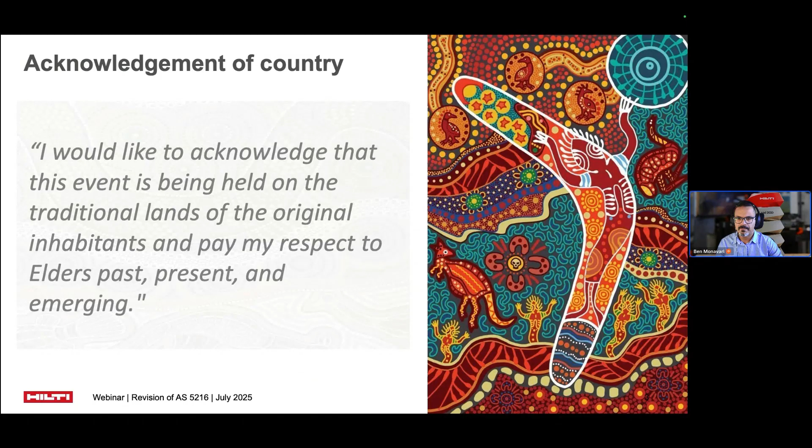Allow me to introduce myself. I'm Ben Monavari, Hilti Australia's Codes and Approval Manager. I'm a structural engineer with over 15 years of experience in industry. I've been with Hilti Australia since 2019, and I hold a PhD in structural engineering and a master's degree in earthquake engineering.

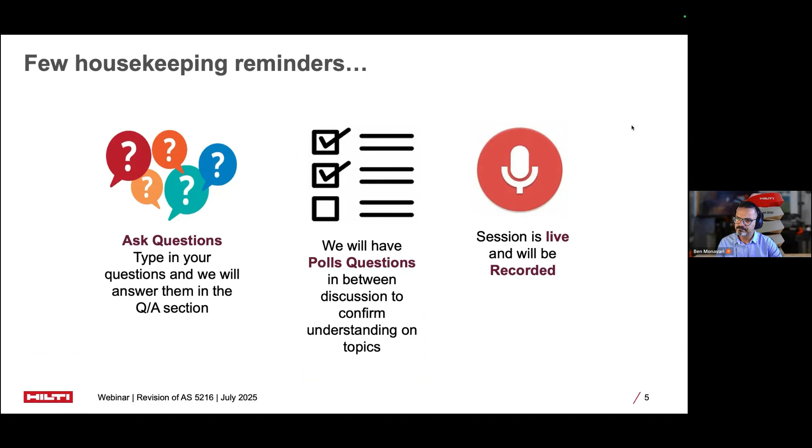To understand the significance of the AS5216 2025 draft and its changes, it helps to revisit where we started. Before 2015, Australia had no standardized design requirements for fasteners. Engineers relied primarily on manufacturers' guidance, which created inconsistencies across the industry. This changed dramatically with the formation of AEFAC in 2012, a collaboration between Swinburne University and 6 industry partners, including Hilti Australia. Their work resulted in SA TS 101 in 2015, Australia's first industry guideline for fastening systems.

The momentum continued with AS5216 becoming a full standard in 2018, followed by its inclusion in the National Construction Code in 2019. The 2021 revision added crucial seismic provisions and specifications for post-installed rebar. Now, the 2025 draft builds on this foundation by introducing fatigue design, durability requirements, improved post-install rebar design method, and provisions for power-actuated fasteners. These provisions significantly improve the standard.

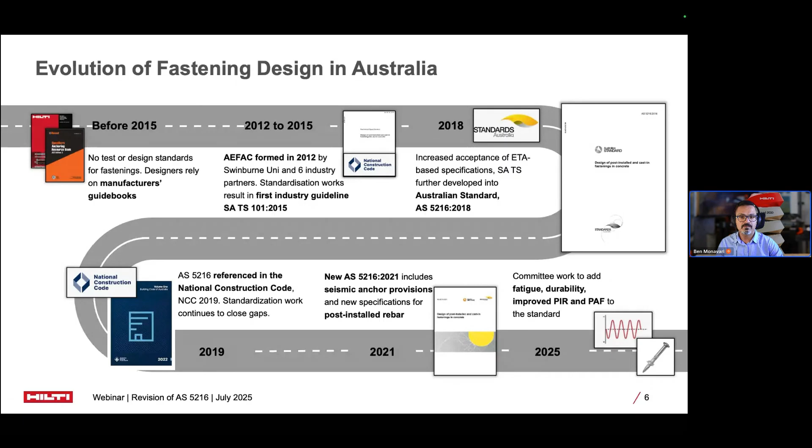As discussed, the 2025 revision introduces 4 key enhancements that will transform fastening design practices in Australia. First, a new normative framework for fatigue design in Appendix G, addressing a critical gap for infrastructure and machinery applications. Second, mandatory durability design requirements in Section 10 ensure long-term performance considerations. Third, new provisions for power-actuated fasteners in Appendix E, specifically for redundant non-structural systems. Finally, an advanced bond splitting model for post-install rebar in Appendix D, offering significant design efficiencies. Each of these enhancements responds to identified industry needs and aligns Australian practice with international best standards.

Let's examine each area in detail.

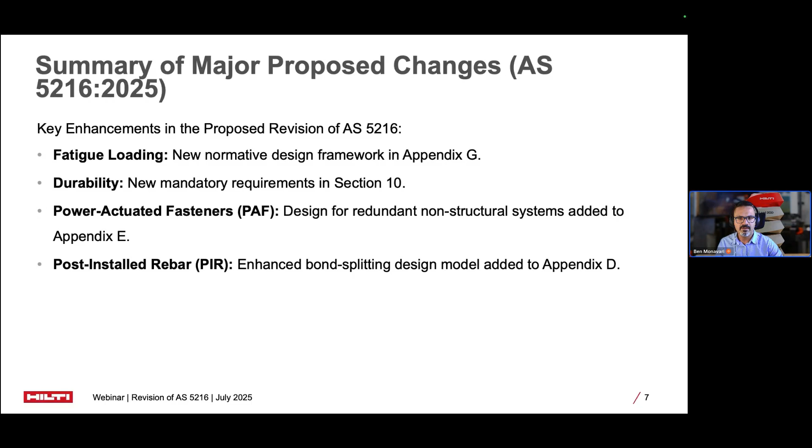Before going to the next slide, I want to start with a question - the first one, which you should see as a pop-up on your screen. Which AS5216 2025 enhancement are you most interested to learn about in this session? Is it the fatigue design framework? Is it durability requirements? Is it about power-actuated fasteners provisions? Or is it about the improved post-install rebar design method? There's no right or wrong answer here. I just want to understand what is the most important update in this standard. I'll wait a couple of seconds to see how you want to respond, and then we go to the next slide.

Okay, I don't see the answers here, so I will just proceed with this one.

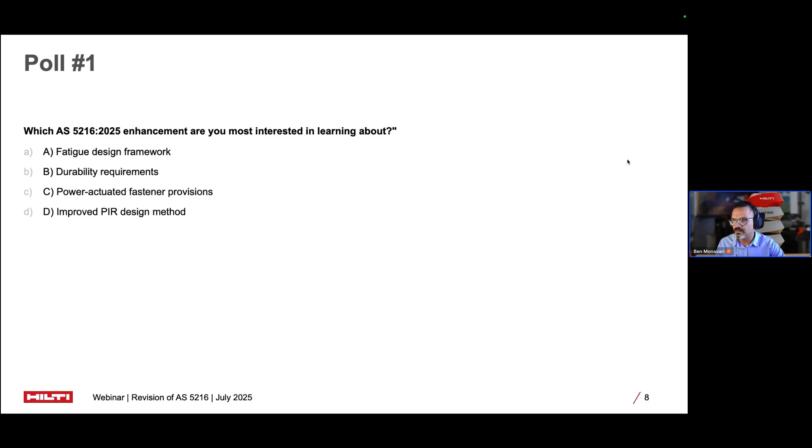Let's begin with fatigue design, a critical consideration for infrastructure, machinery support, and dynamic systems that has been largely overlooked in Australian practice until now.

Appendix G introduces the first normative guidance for fatigue design under AS5216. Previously, AS5216 2021 contained no normative content for fatigue, and designers relied on AEFAC Technical Note 14 as guidance. The 2025 draft fundamentally changes this by formalizing fatigue design requirements. The framework applies to pulsating tension and alternating or pulsating shear actions, but importantly excludes redundant non-structural fasteners, fastening with annular gaps, and shear loading with lever arms. A critical requirement is mandatory pre-qualification to EAD 330250, the European assessment document for fatigue testing of post-installed fasteners.

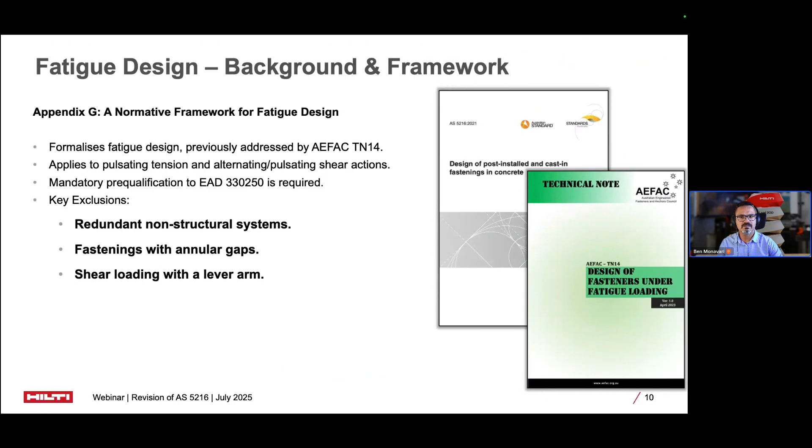It's essential to understand that fatigue represents a distinct loading category. Fatigue is characterized by repeated high-frequency load cycles, typically between 10,000 to 100 million cycles. This distinguishes it fundamentally from seismic actions, which involve fewer cycles, usually between 10 to 10,000, and shock loads, which involve very few cycles, typically between 1 to 20. Each loading type affects fasteners differently. While seismic loading might cause 100 significant cycles during an earthquake, fatigue involves millions of small amplitude cycles from machinery vibration or traffic loading, and so on. This difference in behavior means fatigue must be treated as its own distinct design category with specific testing and design requirements.

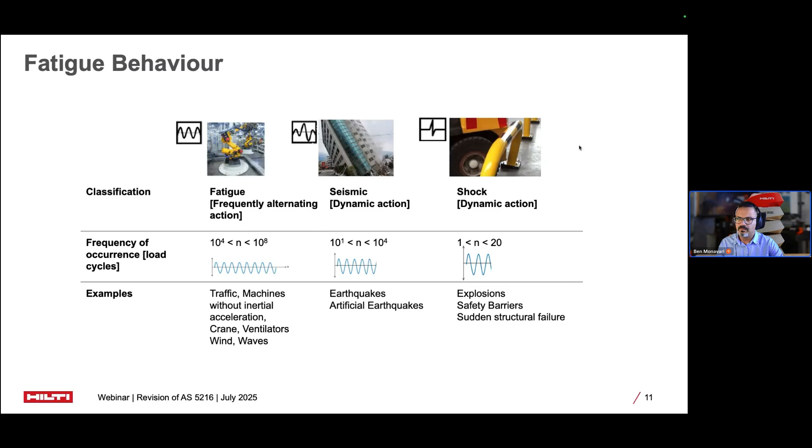Okay, next it's time for the second question. Which loading scenario represents a fatigue condition? 50 load cycles during an earthquake, 500,000 cycles from machinery vibration, 5 cycles from wind gust, or a single impact from dropped equipment.

I guess this is a very easy question, and many of you are responding with the correct option, which is B: 500,000 cycles from machinery vibration is a fatigue load.

Fatigue design is built around the SN curve, also known as the Wöhler curve. This fundamental relationship shows how load range and the number of load cycles affect resistance. The curve demonstrates that as the number of cycles increases, the allowable load range decreases, eventually flattening at what we call the endurance limit.

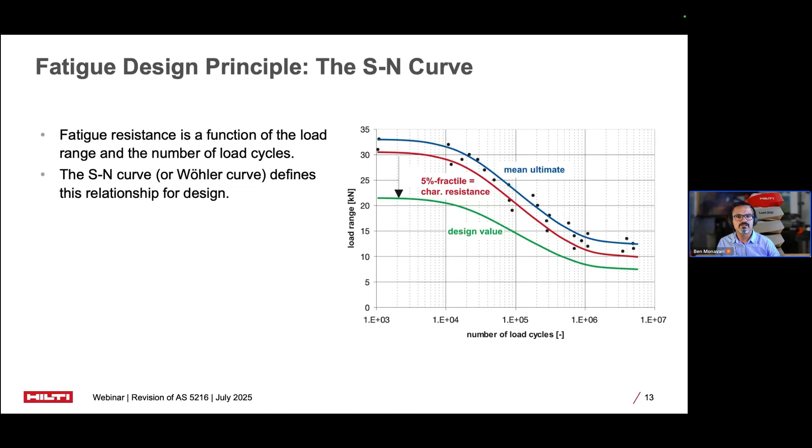Importantly, designers don't use average values in fatigue design. We use characteristic resistance values, the 5% fractile, and apply safety factors to determine design values. This conservative approach accounts for the statistical nature of fatigue failure and ensures reliability over the structure's service life.

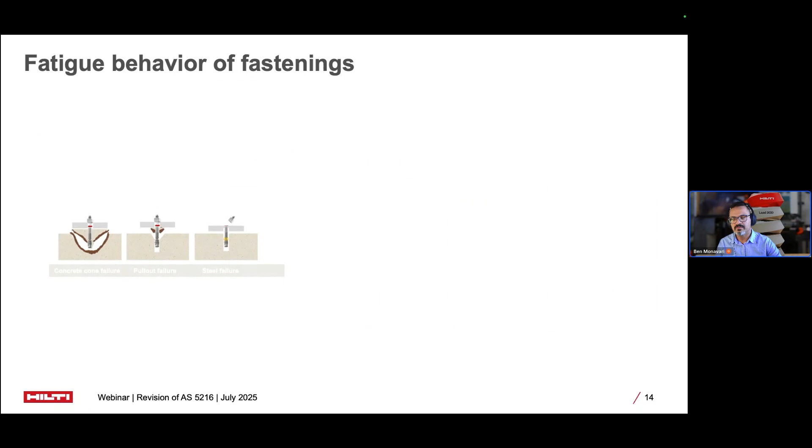Understanding why fatigue-approved anchors are essential requires examining the complexity of post-install fastening systems. These systems include multiple components made from different materials like steel, anchor, chemical bonds, and concrete, each with different fatigue characteristics and different SN curves. The steel component might fail in the bolt, sleeve, or threaded section, and the failure location can vary across anchor sizes due to different manufacturing processes.

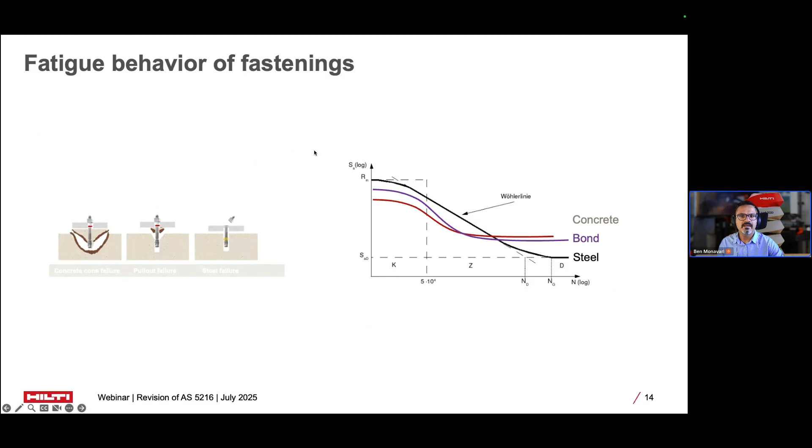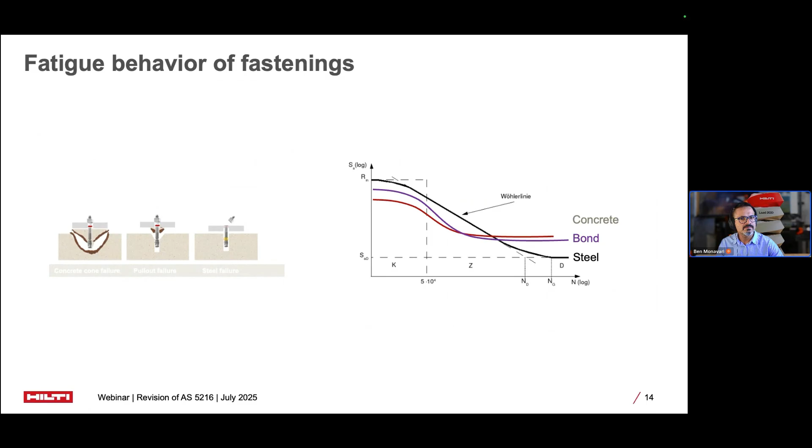On the other hand, the bond component has entirely different fatigue behavior, particularly for chemical anchors. And the base material, which is concrete, adds another layer of complexity because all these components interact as a complete system. Individual component testing cannot predict the overall system performance. This is why fatigue-approved systems must be tested as complete assemblies. And perhaps this is why different anchor systems require separate fatigue qualification, even when they appear very similar.

Cyclic loads are categorized into two main types: pulsating and alternating loads. Pulsating loads maintain the same sign throughout each cycle. For example, tension loads that vary from 10 kilonewton to 50 kilonewton but never go to compression. These are common in suspended loads subject to vibration.

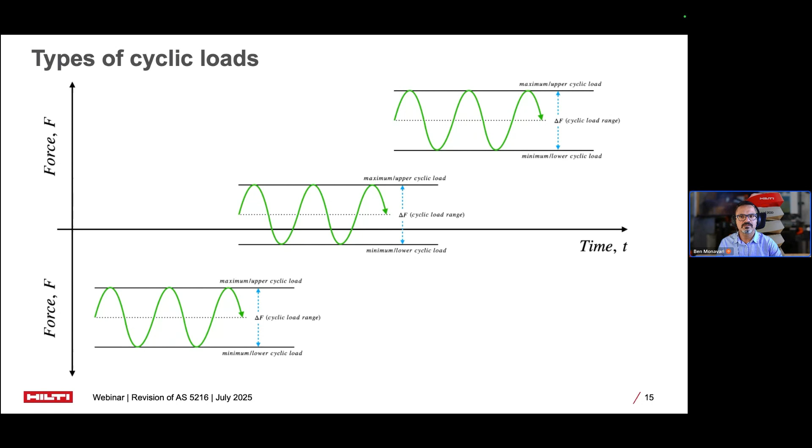On the other hand, alternating loads change sign during each cycle, from tension to compression and back again. This might occur in connections subject to wind loading or seismic action. The distinction is crucial because alternating loads are generally more damaging to fatigue life.

Appendix G includes a simplified design method aligned with Method 2 of EOTA TR061. This approach treats the full applied load as cyclic and checks it against the fatigue endurance limit. While conservative, this practical approach works well when exact load cycle information isn't available, which is often the case in real projects. The design fatigue resistance equals the characteristic fatigue resistance divided by the appropriate safety factor. This ensures adequate safety margins while providing a straightforward design approach that engineers can implement.

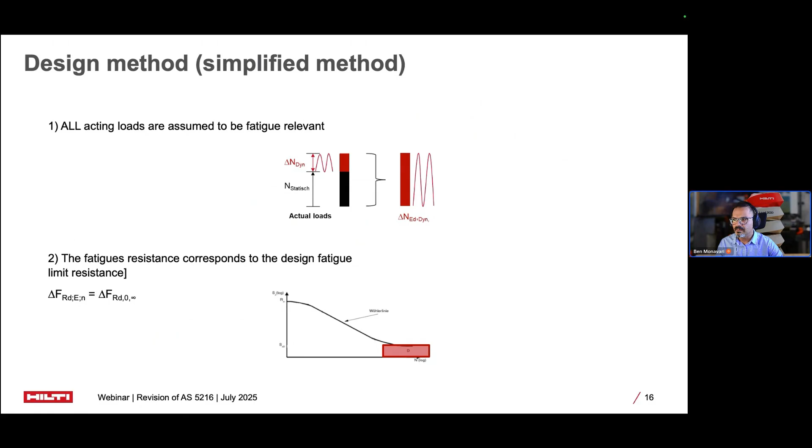Okay, it's time for the third question of today's webinar. In the simplified fatigue design method, what percentage of the applied load is considered fatigue relevant? Is it 25%, 50%, 75%, or 100%? I will wait a couple of seconds for your answer.

I feel like I've already answered this question in the last slide. As I said before, in the simplified method, 100% of the whole load is considered fatigue relevant, which could be a bit conservative, but that's how the simplified method works.

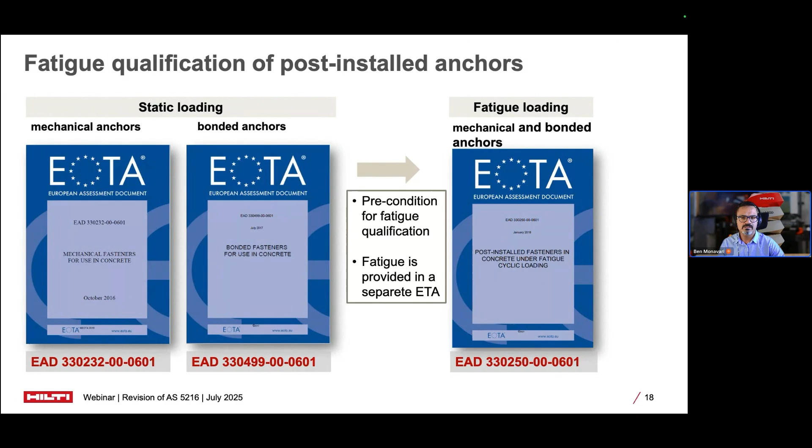For a fastener to be used in fatigue design applications, it must undergo rigorous qualification to EAD 330250. However, this isn't a standalone process. The fastener must first meet static qualification requirements, either EAD 330232 for mechanical anchors or EAD 330499 for chemical anchors. Once we have static qualification, fatigue-specific testing begins. This comprehensive testing program evaluates all potential failure modes under cyclic loading conditions. The resulting European Technical Assessment contains all the resistance values and reduction factors required for fatigue design calculation.

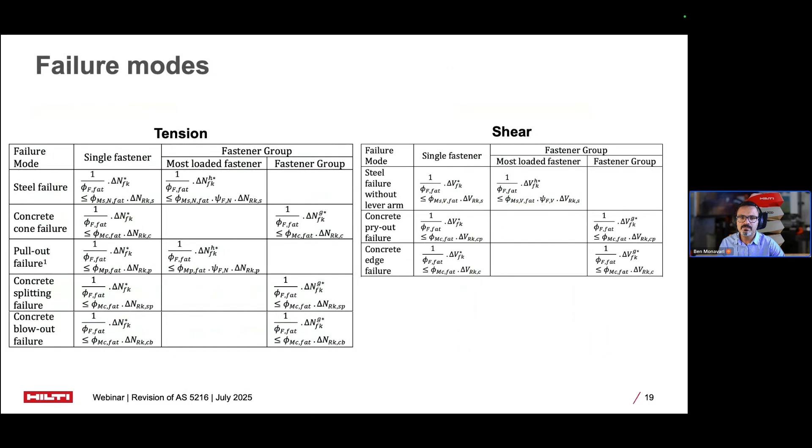Fatigue design requires verification of all potential failure modes: tension and shear, single anchor and group anchor configurations, and so on. Each failure mode has specific fatigue resistance values and reduction factors that must be applied. It's important to note that fatigue doesn't just affect one failure mode. Steel failure, bond failure, and concrete failure all respond differently to cyclic loading. The designer must check all the failure modes.

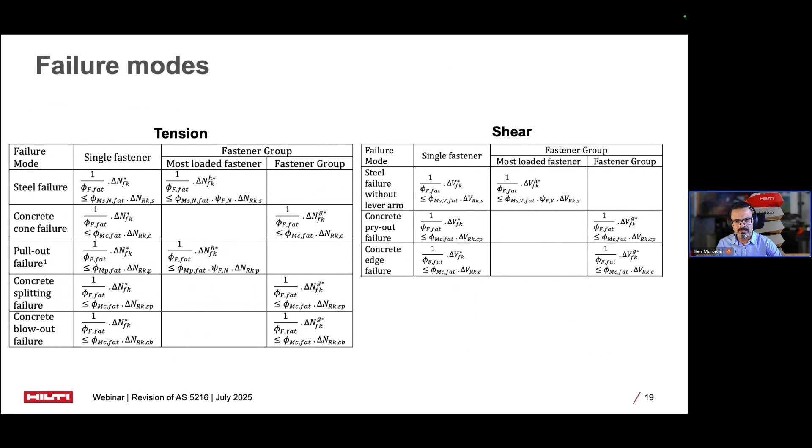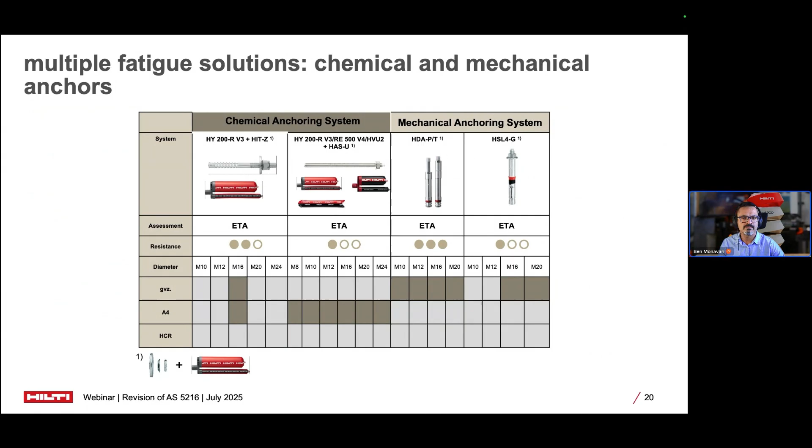Moving to our next major enhancement, durability requirements, which are equally crucial and important for long-term structural performance. Section 10 of the AS 5216-2025 draft introduces a structured approach for assessing long-term fastener performance.

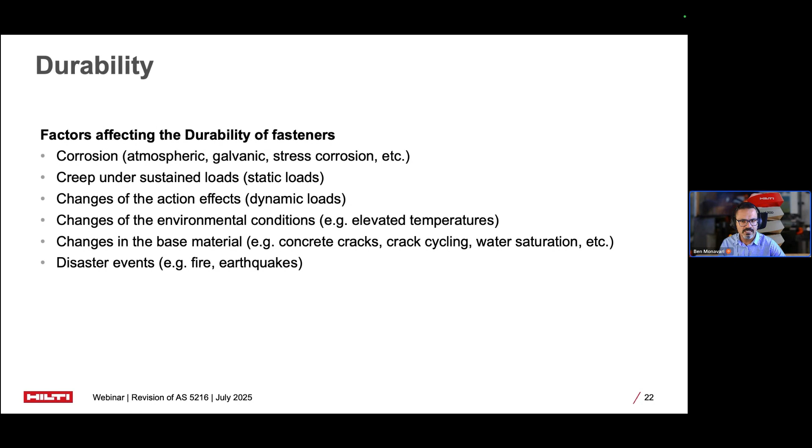Base material conditions are also important. Concrete cracking, crack cycling, water saturation, and carbonation all affect fastener performance. Finally, disasters like fire or earthquakes can significantly impact durability. The new standard requires designers to systematically assess these factors rather than rely on generic assumptions.

The durability assessment framework distinguishes between macro and micro environments. The macro environment includes geographic location factors covered by AS 4312 corrosivity zones, essentially the broader environmental conditions affecting the structure. However, the microenvironment around each fastener can be quite different.

The framework identifies 4 distinct zones: exposed fastener component, the fixture and any annular gap, intermediate layers such as grout or sealant, and the embedded portion within the base material. Each zone can have different corrosion risk and exposure conditions. For example, the exposed portion might face severe marine conditions, while the embedded portion is protected within concrete. This detailed assessment enables more accurate durability predictions.

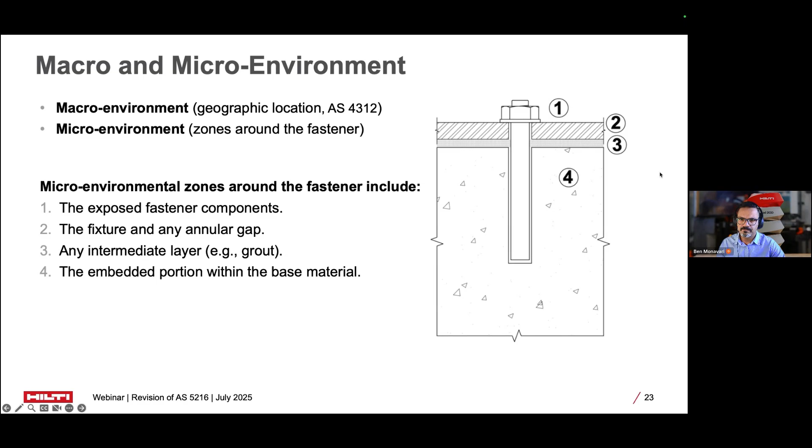All right, time for the next question. How many distinct microenvironments does AS 5216-2025 identify around each fastener? I also responded to this question in the last slide, but let's see how many of you catch that in the slide. So the first option A is 2, B is 3, C is 4, and D is 5. I will wait a couple of seconds for you to respond.

Okay, as many of you again have responded to these questions correctly, option C is the correct answer. As discussed, the framework identifies 4 distinct zones: exposed fastener, fixture, intermediate layers, and the embedded portion.

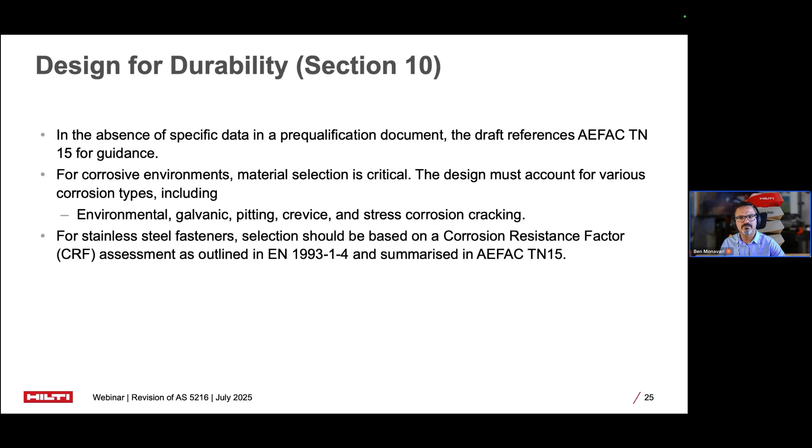So when specific durability data isn't available in a pre-qualification document like ETA, the draft references AEFAC Technical Note 15 for guidance. This comprehensive document provides practical approaches for durability assessment. For stainless steel fastener selection, this is based on corrosion resistance factor, or CRF assessment, as outlined in EN 1993-1-4. This systematic approach matches stainless steel grades to specific corrosive environments, ensuring appropriate material selection for the intended service life.

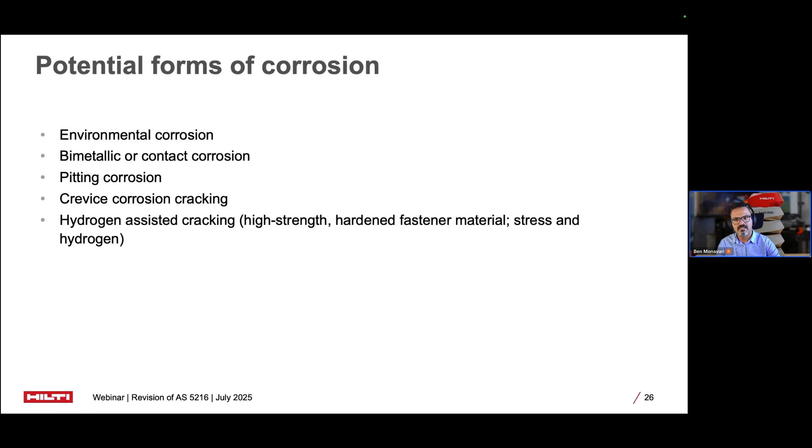The standard addresses multiple corrosion mechanisms that can affect fasteners. Environmental corrosion results from atmospheric exposure and varies significantly across Australia's diverse climatic conditions. Bimetallic or contact corrosion occurs when dissimilar metals are in electrical contact. Pitting corrosion creates localized deep penetration, particularly dangerous because it can cause failure with minimal visible indication. Crevice corrosion occurs in confined spaces when oxygen depletion creates aggressive conditions. Hydrogen-assisted cracking affects high-strength hardened fastener material under combined stress and hydrogen exposure. Understanding these mechanisms enables appropriate material selection and protective measures.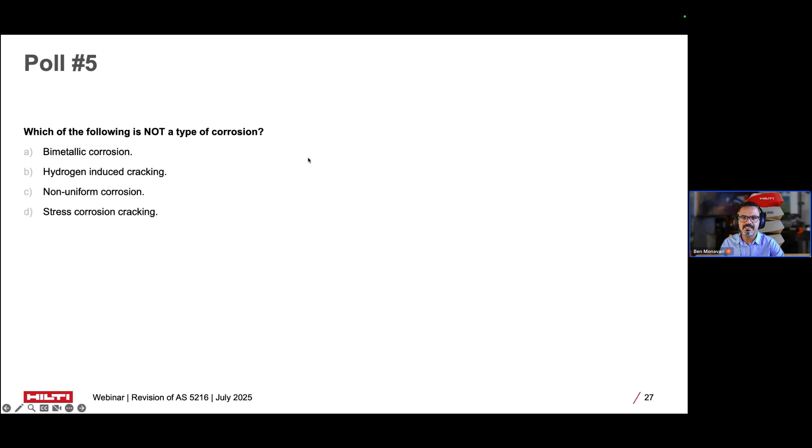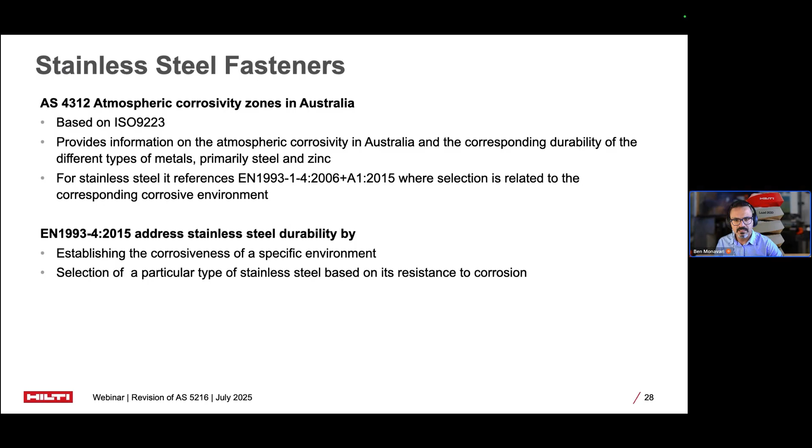Let's go to the next slide. AS 4312 provides atmospheric corrosivity zones for Australia based on ISO 9223, offering information on atmospheric corrosivity and corresponding durability for different metals. However, for stainless steel, it references EN 1993-1-4, which provides a more sophisticated approach. This standard addresses stainless steel durability by establishing the corrosiveness of a specific environment and enabling selection of appropriate stainless steel types based on their corrosion resistance. This two-step process ensures optimal material selection for a given service condition.

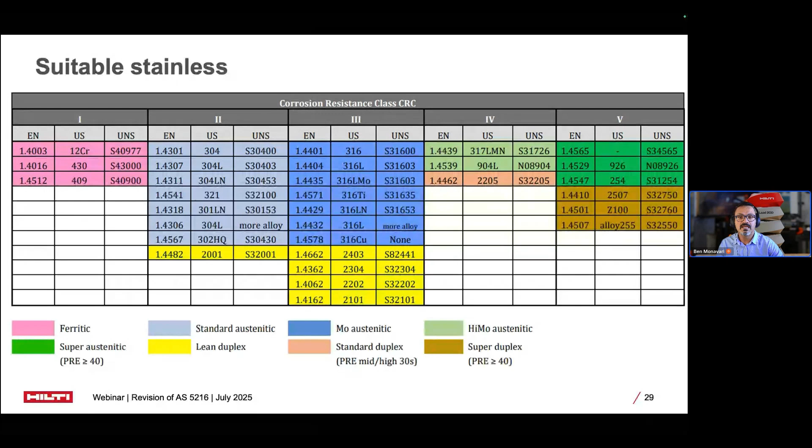This is the CRC table in EFAC Technical Note 15, which categorizes corrosion resistance into 5 levels, CRC1 through CRC5. CRC1 represents low corrosion resistance suitable for mild internal environments, while CRC5 provides high resistance for severe marine or industrial conditions. This systematic approach removes guesswork from stainless steel selection, providing clear guidance on appropriate grades for specific environments and intended service life.

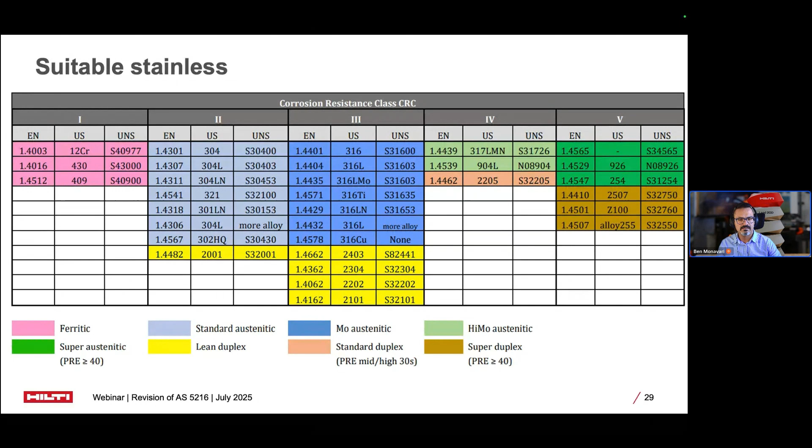Bimetallic corrosion occurs when metals with different electrochemical potentials are in electrical contact in the presence of an electrolyte. The more noble metal becomes the cathode and is protected, while the less noble metal becomes the anode and corrodes first. Critical considerations include the area ratio between the metals.

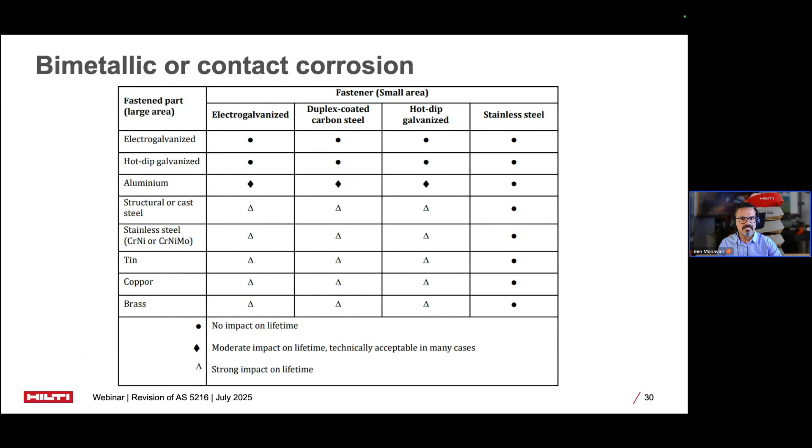A smaller fastener in contact with a larger structural element creates particularly aggressive conditions for the fastener. The design guidance emphasizes that we need to avoid situations where the fastener is less noble than the fixture, as this accelerates fastener corrosion and can lead to premature failure.

Hilti employs both active and passive corrosion protection measures to extend component service life. Active protection includes advanced planning that considers corrosion from the design stage, galvanic separation to prevent bimetallic corrosion, and selection of corrosion resistance materials. Passive protection involves measures that directly affect the component and hinder corrosive medium access.

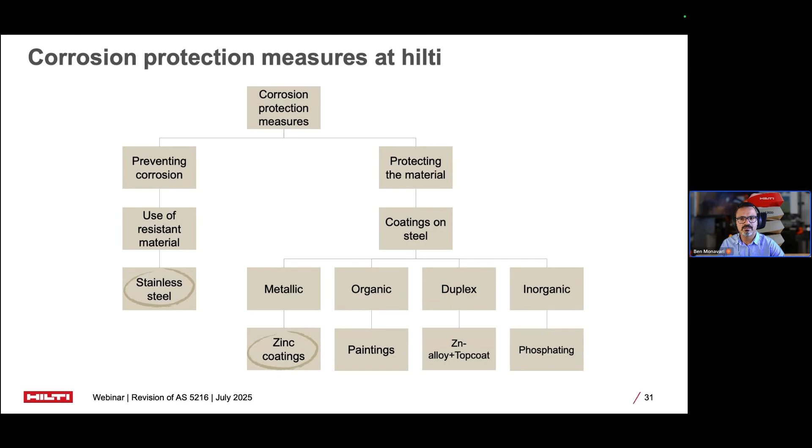This includes metallic coating like zinc plating, organic coating such as paint systems, duplex system combining multiple coating types, and inorganic coating like phosphating. Material selection between stainless steel and protective coating depends on the specific environment and application requirements, with stainless steel generally preferred for severe or long-term exposure conditions.

Okay, now let's examine the new provision for power actuated fasteners in Appendix E, addressing a significant gap in the current standard.

Power actuated fasteners represent a complete fastening system, including fasteners, typically nails or threaded studs, a power source, and specialized power actuated tools. The power source varies by technology. Powder actuated tools use cartridges, gas actuated tools use pressurized gas cans, and battery actuated tools use rechargeable battery systems. Each technology has distinct characteristics regarding power output and application suitability.

Critical factors for successful installation include proper power adjustment, tool settings, and fastener selection to ensure appropriate penetration in the base material. Incorrect settings can result in either insufficient penetration or excessive penetration that damages the base material and the fixture.

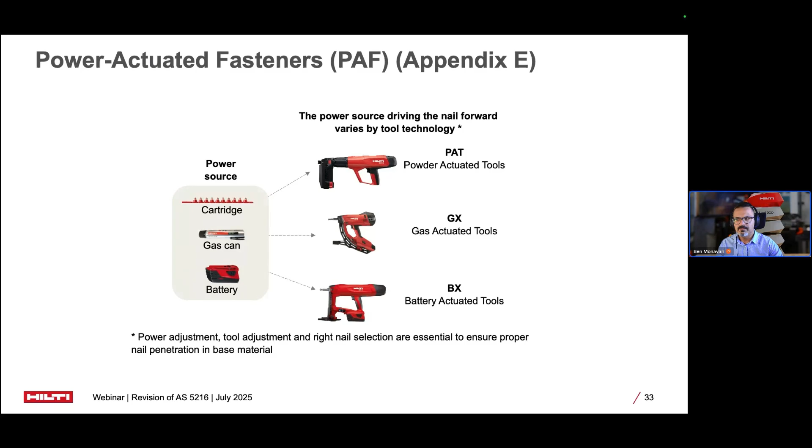Power actuated fasteners fall into two main categories: drive pins and threaded studs. Drive pins feature an enlarged head that directly supports the fixture. The fixture is attached via the pin head, making installation quick and efficient for appropriate applications.

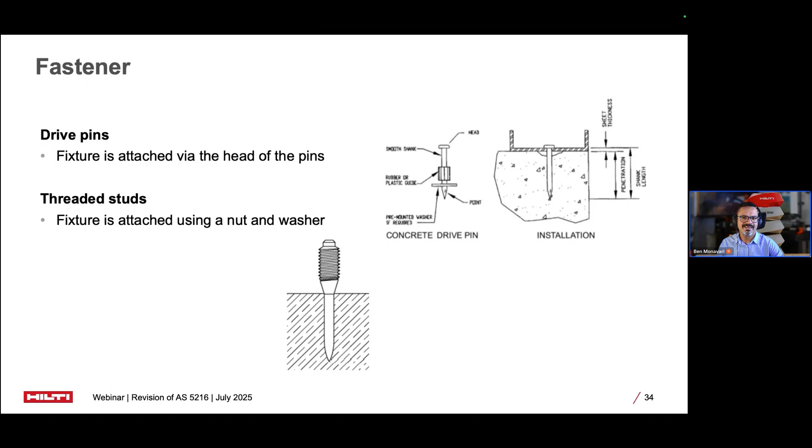Threaded studs, on the other hand, extend through the fixture and are secured using nuts and washers similar to conventional bolted connections. This arrangement provides adjustability.

The new provisions specifically address redundant non-structural systems, a critical concept for power-actuated fastener applications. Non-structural elements are components attached to and supported by the structure, but not contributing to the primary load-resisting system. Redundant systems are statically indeterminate with at least 3 supports or fixing points. The key characteristic is that the system retains static stability after losing any fixing point.

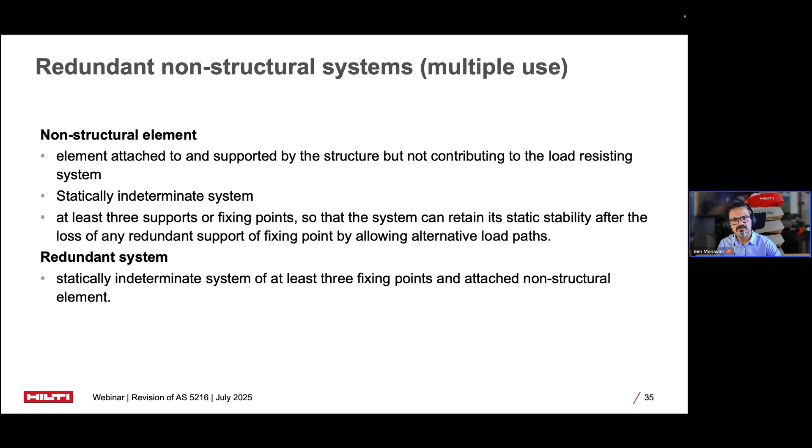This redundancy principle is crucial for power-actuated fasteners because it acknowledges that individual fasteners might fail without causing system collapse, because of the existing redundancy in the design.

Okay, so while AS5216 comprehensively covers cast-in and post-install fasteners, it previously didn't address power-actuated fasteners. The 2025 revision begins to fill this gap with general guidance provided in the standard and detailed information available in AEFAC Technical Note 11. This development recognizes the widespread use of power-actuated fasteners, or PAF, in construction and the need for standardized design approaches to ensure safe and reliable performance.

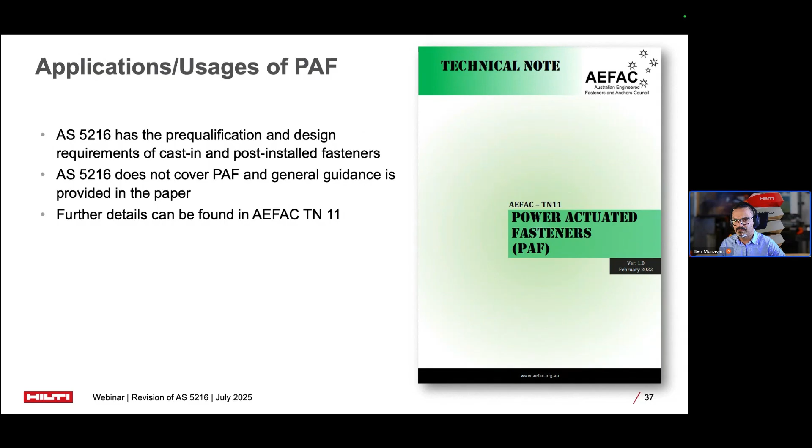For safety-critical applications, power-actuated fasteners must have current pre-qualification documents such as European Technical Assessment, or ETA. Design must incorporate planned redundancy following the redundant design principles established in AS 5216. This approach ensures that even in safety-critical applications, power-actuated fasteners can be used safely provided appropriate redundancy and qualification requirements are met.

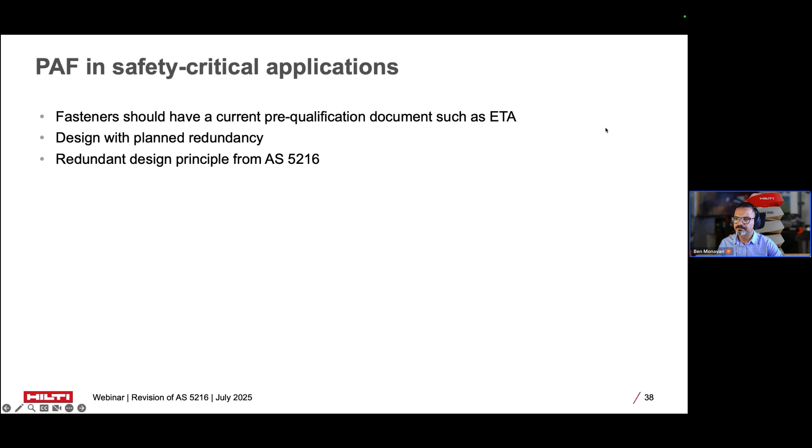I'm excited to highlight that Hilti's seismic nail, or seismic pin, is the world's first nail tested and approved system for seismic conditions. This nail features several groundbreaking characteristics, including the patented

helix tip design, which rotates during installation, screwing the pin into concrete rather than simply being driven. This provides up to 50% higher tension capacity in cracked concrete compared to conventional power-actuated fasteners, systems, or nails.

The letter X on the nail head ensures proper identification and inspection, crucial for seismic applications. And most importantly, this system provides a safer and 4 times more productive solution than current methods, with limited exposure to dust and hazardous substances, and reduced fatigue when working overhead. This innovation demonstrates how power-actuated fasteners can evolve to meet demanding performance requirements while improving installation safety and efficiency.

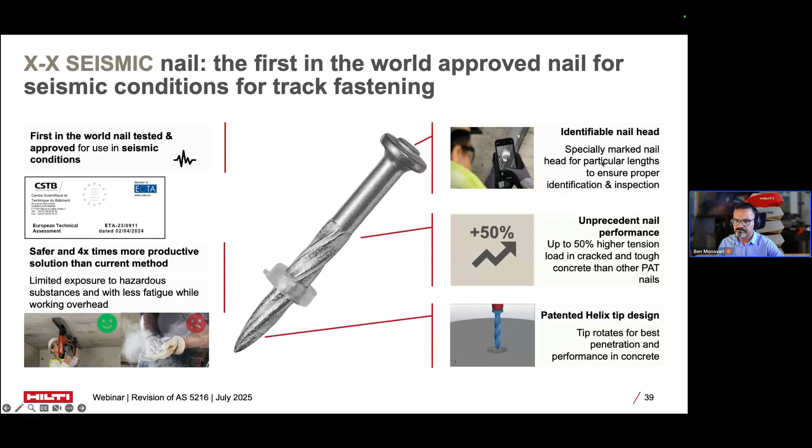Finally, let's examine the enhanced provisions for post-install reinforcing bar connections, perhaps the most significant technical advancement in the AS 5216 revision.

Understanding post-install rebar requires distinguishing it from chemical fasteners. Chemical fasteners connect a steel fixture to concrete, with the anchor taking up both tension and shear loads directly. The interface surface roughness doesn't significantly affect performance.

Post-install rebar, on the other hand, connects two concrete members, existing and new construction. Shear forces transfer through friction over the interface surface area, making interface roughness critical. The post-install rebar acts primarily in tension, connecting the concrete section rather than supporting an attached fixture. This fundamental difference requires different design approaches and failure mode considerations.

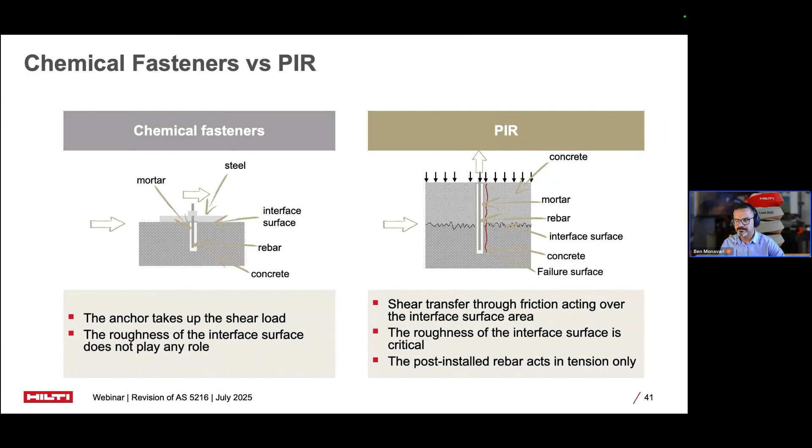The failure modes for chemical fasteners include steel failure, pull-out failure, splitting failure, and concrete breakout failure. But in the rebar model, we only have steel failure, pull-out failure, and splitting failure modes. In this model, concrete breakout is restrained and doesn't develop. So that's the only difference between these two methods.

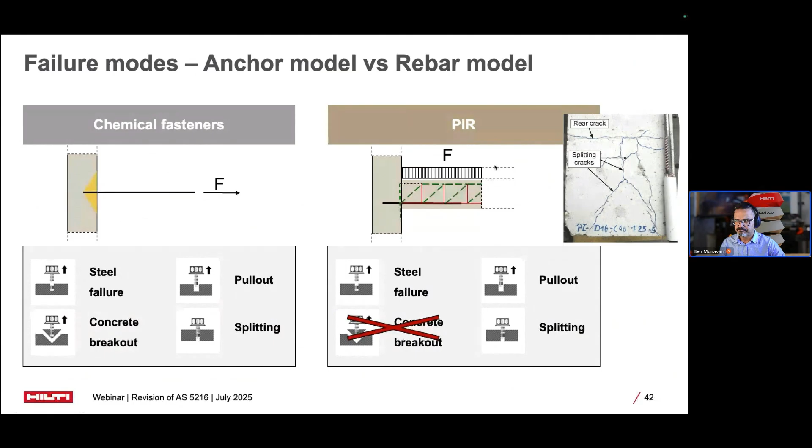Current post-install rebar design in AS 5216 2021 Appendix D links to AS 3600 2018 Section 13, which covers stress development of reinforcement. However, AS 3600 doesn't contain specific provisions for post-install rebar applications, requiring designers to make conservative assumptions that often result in long embedment depth.

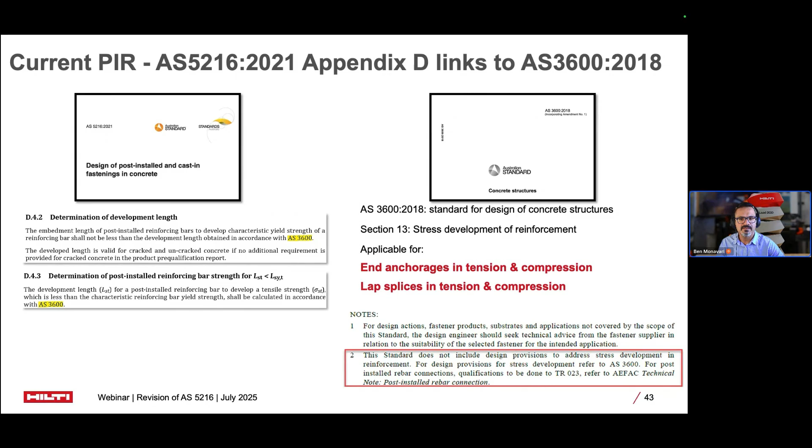The current equal-to-cast-in approach assumes that post-install rebar performs identically to cast-in reinforcement. While conservative, this approach has significant limitations.

Bond strength of, as an example, RE500V4 chemical anchor can achieve up to 14 MPa. However, AS5216 limits the usable bond strength to match cast-in bar allowable values, which is typically around 2 to 4 MPa, depending on the concrete strength.

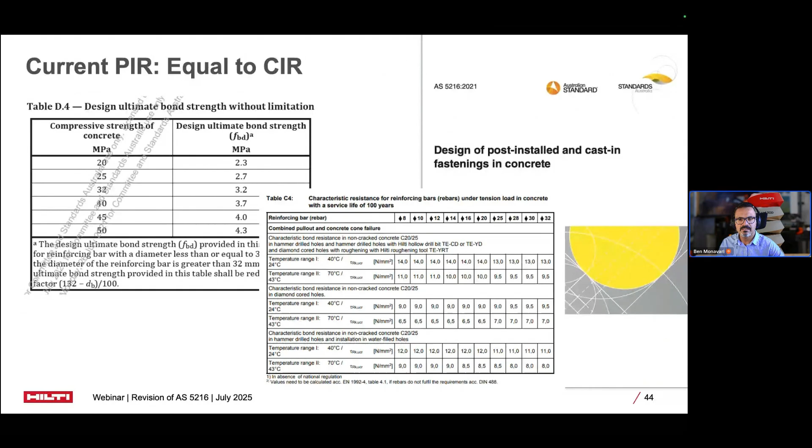So obviously, we're not utilizing the full capacity of the chemical in our post-install rebar connections. This conservative approach often results in deep embedment depths, which are impractical for many applications and don't utilize the superior bond characteristics of chemical anchors.

The improved bond splitting model represents a fundamental advancement. While equal-to-cast-in design requires deep embedment depth for achieving steel yielding, the new model recognizes superior chemical bond characteristics and permits reduced embedment depth.

However, reduced embedment depth creates a potential for concrete cone failure, which must be checked in the new design method. The equal-to-cast-in approach embeds so deeply that concrete cone failure is unlikely, but the improved method requires verification that concrete cone failure doesn't govern the design.

So if I go back to the first slide, in equal-to-cast-in we assume we have a linear relationship between the embedment depth and the maximum capacity of the post-install or cast-in rebar. This is the method equal to cast-in. As you can see here, this is a linear relationship. And if you want to design for yield, which is the blue line, we need to drill to this depth.

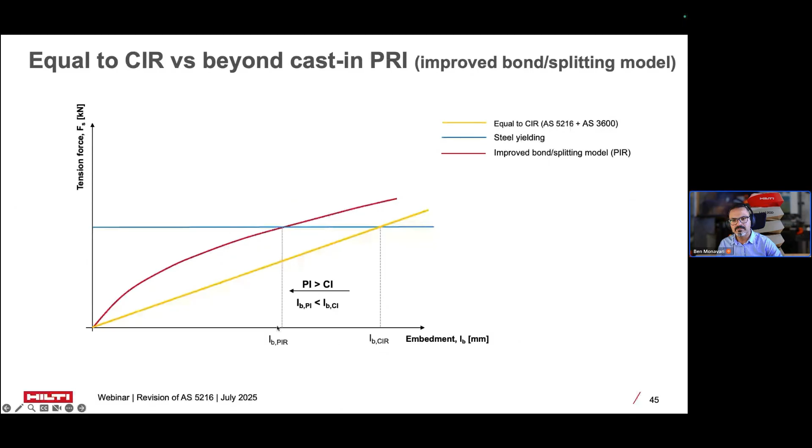But within the new design method, because we are utilizing the higher bond capacity of the chemical, we are having higher capacity, but as you can see here, it's not a linear relationship anymore. So if we want to design for the same yielding capacity of the bar, instead of drilling to this depth, we are reducing the embedment depth to this depth. But because we have reduced embedment depth, we're not sure if the concrete cone failure is governing or not. So that's why in this design method, we also need to check that.

Okay, it's time for the last question of this webinar. What failure mode needs to be checked in the improved post-install rebar design method in comparison to the equal-to-cast-in design method? Steel failure, bond failure, concrete breakout failure, or splitting failure?

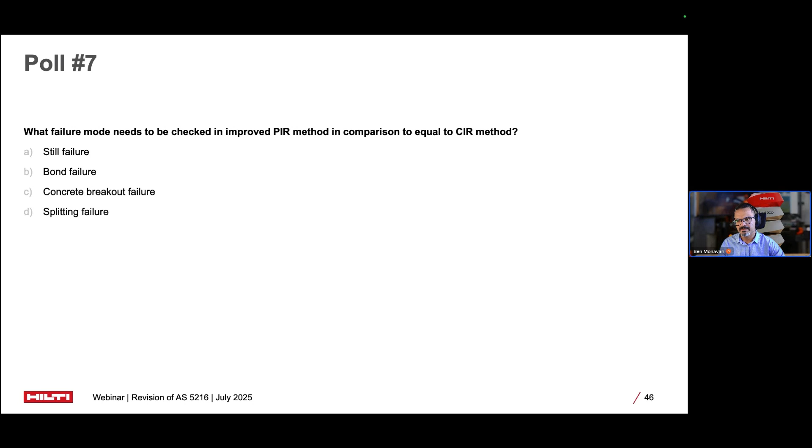Three distinct post-install connection types now exist, each with different design methods and qualification requirements. Chemical fasteners follow AS 5216 section 6 and 7 with EAD 330499 qualification, and the product has a different ETA based on this EAD.

Equal-to-cast-in post-install rebar uses AS 5216 Appendix D plus AS 3600 section 13 with a different EAD, and it has a different ETA. And the new cast-in post-install design method, which is the beyond cast-in design method, utilizes the enhanced design method in AS 5216 2025 revision with a new EAD qualification, which requires another ETA.

So as an example, in this case, for RE500V4, which has been approved for this system, we have 3 different ETAs because it has been approved for different applications. It can be used as a mechanical or chemical anchor. It can be used as a post-install rebar with the equal-to-cast-in rebar design method, or it can be used for post-install rebar applications with the beyond-cast-in, new design method in AS 5216.

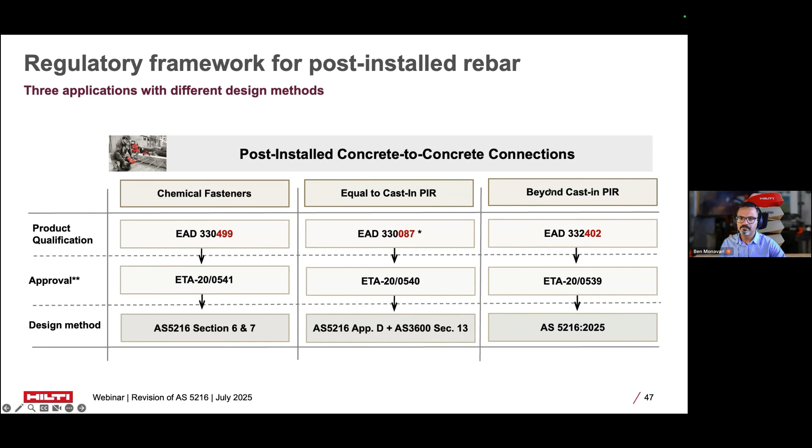Okay, the improved bond splitting model accounts for actual stress distribution along the length of the bar. Equal-to-casting assumes uniform bond stress distribution, but in the improved model, the bond stress varies with concrete cover and depth. With high concrete cover, both design methods show increased capacity, but the improved model continues gaining capacity.

Similarly, the improved model shows varying bond strength with embeddment depth, reflecting actual load distribution behavior rather than a constant relationship assumed in equal-to-cast-in system.

So if I show you here, this is the equal-to-cast-in graph, look at how the capacity changes with embeddment depth. This is the bond strength. So the bond strength in equal-to-cast-in system is constant - it doesn't really matter on the embeddment depth. But as you can see here, with the new design method, we start with a much higher capacity, and as we go deeper into concrete, we have less capacity.

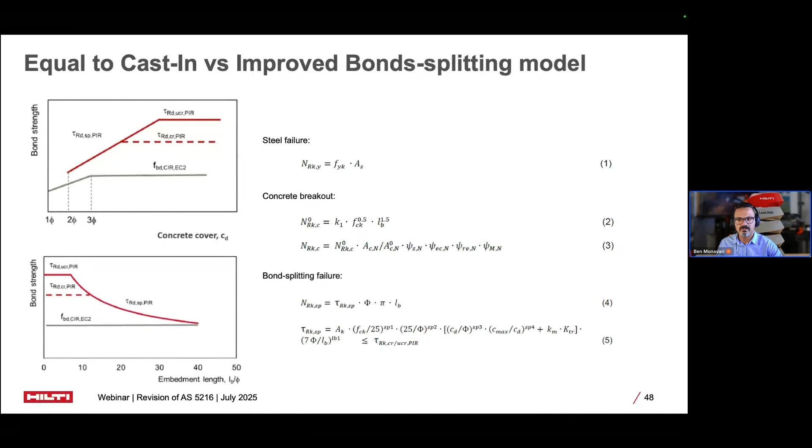So it's a very hard calculation if we want to do it by hand, but obviously with PROFIS Engineering software, we can do it automatically with ease.

Next slide. Currently, two Hilti chemical anchors are qualified for the improved bond splitting failure design. The first one is RE 500 V4, and the second one is HY 200-R V3. These anchors have undergone extensive testing to EAD 332402 and received European Technical Assessment, ETA, specifically for bonded casting performance.

Importantly, chemical anchors are not interchangeable in this design method, because each chemical has unique characteristics and load distribution properties, which can be achieved or derived through testing.

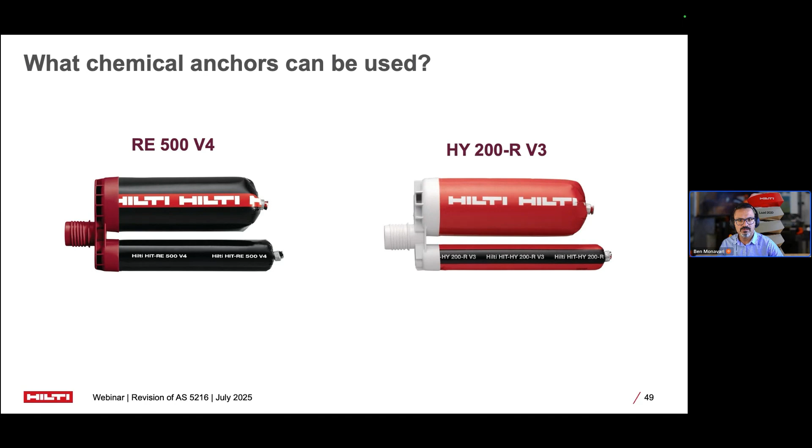Okay, so let me show you a couple of examples - there are two examples. The first example, we have a slab to wall connection with specific loading conditions in 30 MPa concrete. Using the standard AS3600 design method, which is equal-to-cast-in, we need approximately 650 mils in depth, which often is impossible in typical wall constructions.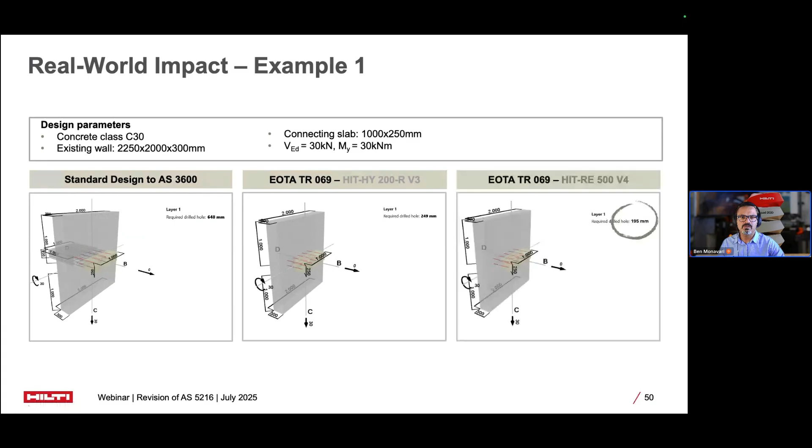And then if we go to HY200V3 as an example, we reduce depth to 250 mils. And if we use RE500V4 in this example, we achieve 195 mil depth, which in this example is a 70% reduction in depth, transforming an impossible connection into a practical solution while maintaining structural integrity and safety margins.

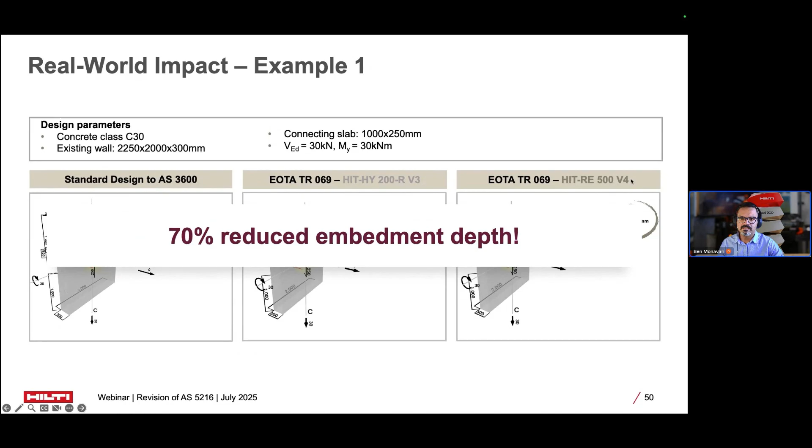As you can see here in this example, HY200 gave us a better result because this is a different design, specifically because we have a different confinement. So with different confinement, either RE500 or HY200 can give us a better result.

So in your design, I suggest checking which one gives you better capacity. If it's possible, use HY200 because it's a fast cure epoxy. For long depth, especially for rebar applications, I would suggest going with RE500V4 because it's a slow cure epoxy and it gives you more time to inject the chemical and install the rebar.

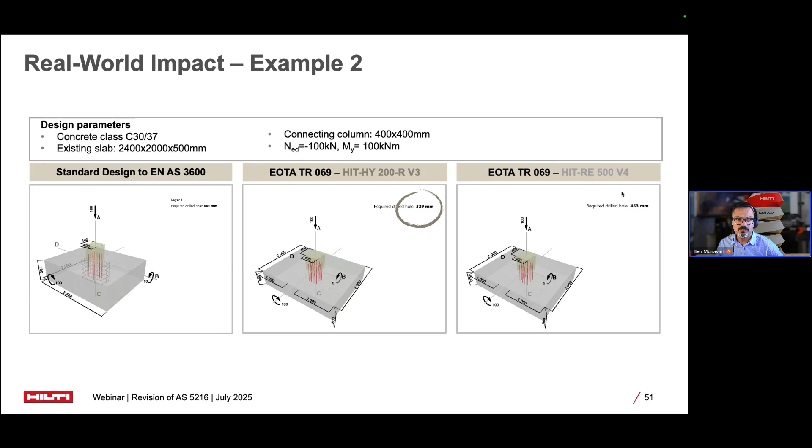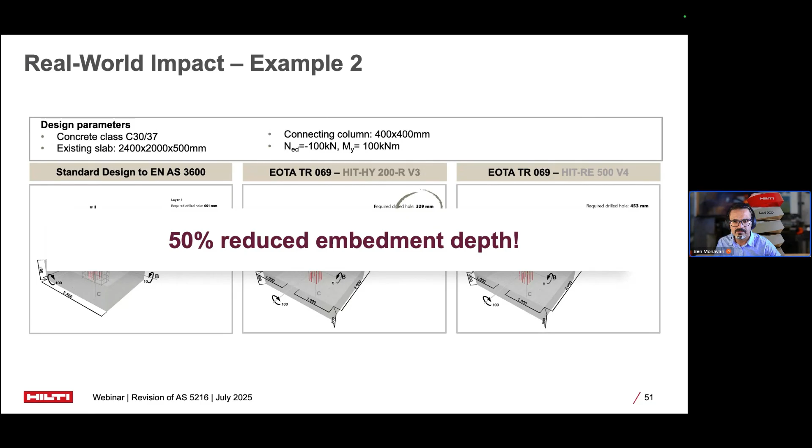So this is a 50% reduction, which represents substantial cost saving, reduced drilling time, improved construction safety, and enhanced sustainability through reduced material usage and construction impact. So it's not just about saving on the epoxy - the installation and everything is going to be saved as well.